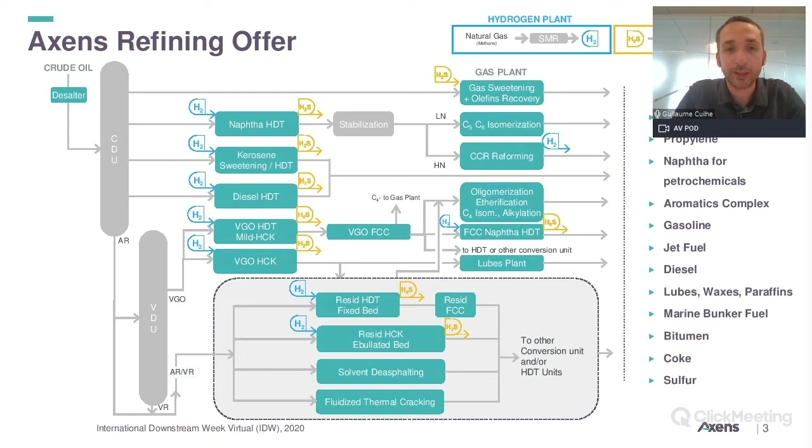Flexi-coking comes in complement to our portfolio, alongside our resid hydrotreating technology (Hyval), our resid hydrocracking technology (H-Oil), our solvent deasphalting technology (Solvahl), and now, in complement, the fluidized cracking technology, flexi-coking.

So why flexi-coking? Flexi-coking is there to target zero fuel. It means we will address both the new requirements in terms of fuel oil market and the new requirements in terms of petcoke market.

Why for the fuel oil market? Because we are going to produce no fuel oil market, no fuel oil. It means we are also going to produce no bunker fuel. This solution is good as it's not subject to future IMO specification changes. We see that in past years emissions have become more stringent on fuel oil, reaching down to 0.1% sulfur in bunker fuel.

Also, in terms of petcoke, flexi-coking produces nearly no solid fuel, and we see new petcoke specifications emerging. It's also producing lower sulfur petcoke, creating less dependency for the refiner on eventual future petcoke market evolution or specification changes.

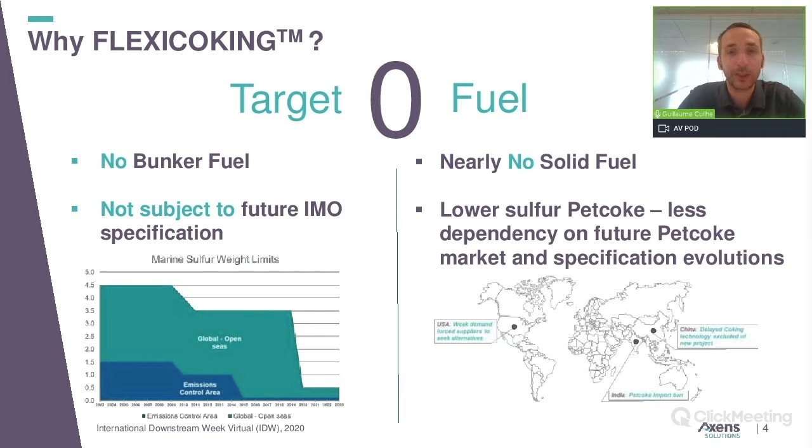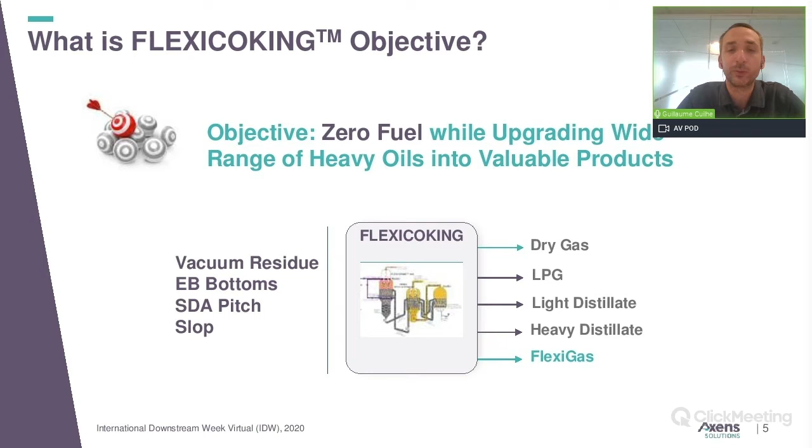So what is the flexi-coking objective? The objective is simple: zero fuel oil production while upgrading a wide range of heavy oils into valuable products. This wide range includes straight run vacuum residue, unconverted oil from ebullated bed, pitch from SDA, or any kind of slop from the refiner. Products include LPG and the whole range of distillates from light coker gas oil to heavy coker gas oil, while producing some flexigas.

What are the general principles of flexi-coking? It's a fluidized thermal cracking process operating at low pressure, less than 2 bar, and high temperature, around 520 degrees C. It's a non-catalytic process, integrated with a gasifier. This gasifier supplies the energy for the process, upgrading the coke produced inside the reactor into flexigas, with a limited purge, generally less than 2%.

The typical performance of flexi-coking is basically full conversion of the feedstock, up to 70% liquid yield according to the type of feedstock, and 3 years of cycle length.

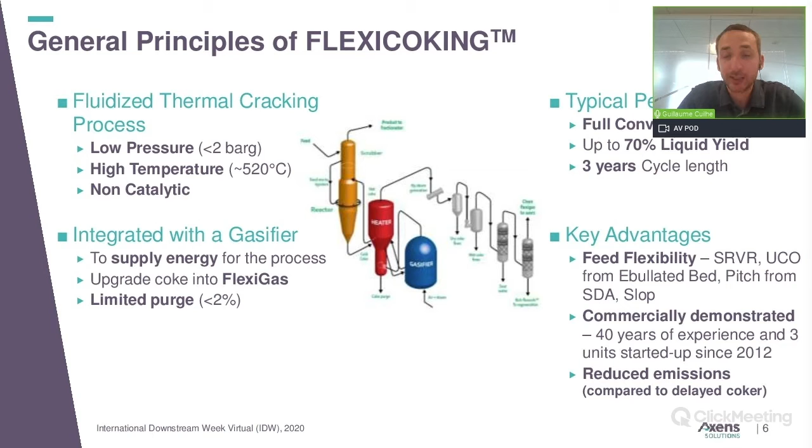Among the key advantages: feed flexibility, of course, processing straight run VR, unconverted oil from ebullated bed, pitch from SDA unit, or slop. It's a commercially demonstrated technology with more than 40 years of experience and 3 units started up since 2012. It also shows reduced emissions compared to a delayed coker, as it's a closed process.

If you look at the simplified scheme of flexi-coking technology, it basically consists of 4 main sections. Let's say a reaction section, which has the 3 main vessels of the process: the reactor, the heater, and the gasifier.

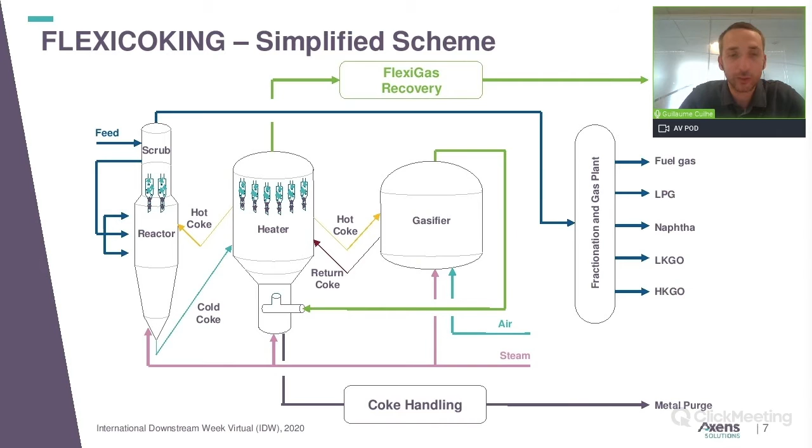And a flexigas recovery section to clean and de-particulate the flexigas. The coke handling section to handle the purge of the flexi-coking technology, and the fractionation and gas plant to recover and separate the effluents of the reactor into different cuts.

Among the technology capabilities of the FlexiCoking, it can handle up to 40% CCR. The largest operating unit is about 65 kBD, and it's demonstrated more than 95% of stream factor. The turnaround cycle is up to 3 years.

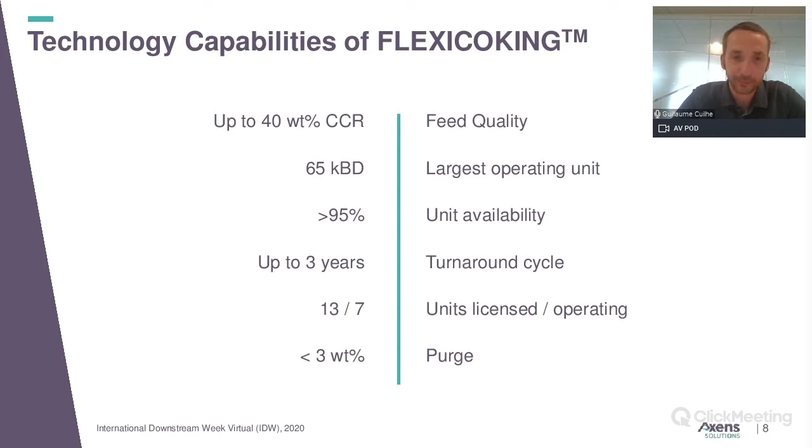There are 13 units licensed and 7 are in operation, with less than 3% of purge. Looking at typical performance of FlexiCoking on a 35,000 barrels per day straight run vacuum resid feed, we obtain around 74% of C3 plus yield and 420 megawatts of thermal energy. The breakdown of the liquid effluent is 6% LPG, 17% naphtha, 23% light flexi-coking gas oil, and 28% heavy flexi-coking gas oil, altogether producing around 3% of purge. The thermal energy is composed of flexigas coming from the gasified coke of the FlexiCoking, and some fuel gas that is also produced in the process.

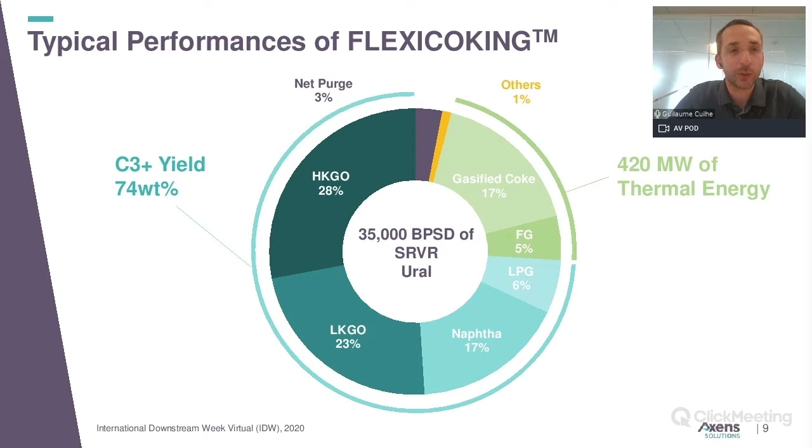What are the key advantages of FlexiCoking? First of all, it's commercially demonstrated, which is key when talking about heavy bottoms upgrading technology. There are 7 units in operation, more than 40 years of experience with this technology, and FlexiCoking has had 6 new licenses since 2012.

This technology also shows high flexibility and produces low-emission flexigas, meaning we can target zero fuel production. It can handle a large range of feedstocks and produces a flexigas with less than 10 ppm H2S content, meaning that while burning it will produce low SOx and low NOx. It's also CAPEX and OPEX competitive because it's a low pressure carbon steel construction process. It requires no catalyst and no hydrogen, and demonstrates a very high stream factor of more than 95%.

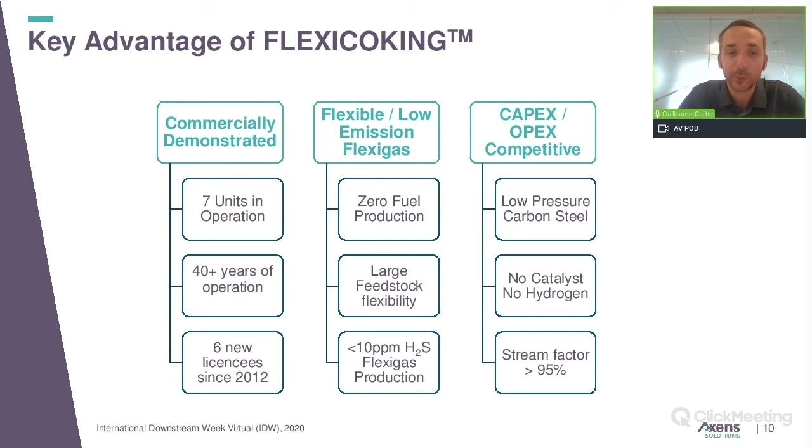Looking at the reference list, FlexiCoking in the world has 13 licenses spread across all continents - in America, in Europe and Russia, and in Asia. The oldest unit is in Japan, operating since 1976 in Kawasaki at 24 kBD. And the latest unit in operation was started up in 2019 in Hengyi, in Brunei, at 19 kBD.

The largest operating unit is in Venezuela, at 65 kBD, and there are two licenses in Russia, in Tuapse and in Moscow, at 50 kBD and 40 kBD capacity respectively. Two new units are expected to start up in 2021 - in Talara, Peru at 23 kBD, and in China, in Hongrun, at 19 kBD.

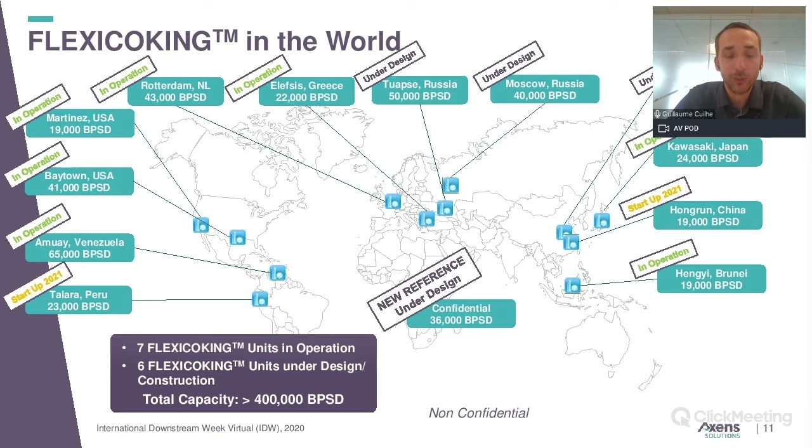FlexiCoking also brings a change in terms of utility balance. As it's a flexigas producer, this flexigas can substitute for fuel gas. It can be used in various places inside the refinery, for steam production, for electricity production, and more generally in refinery and petrochemical furnaces. Thanks to Heurtey Petrochem, we have unique know-how in furnace retrofitting while implementing FlexiCoking technology inside the refinery.

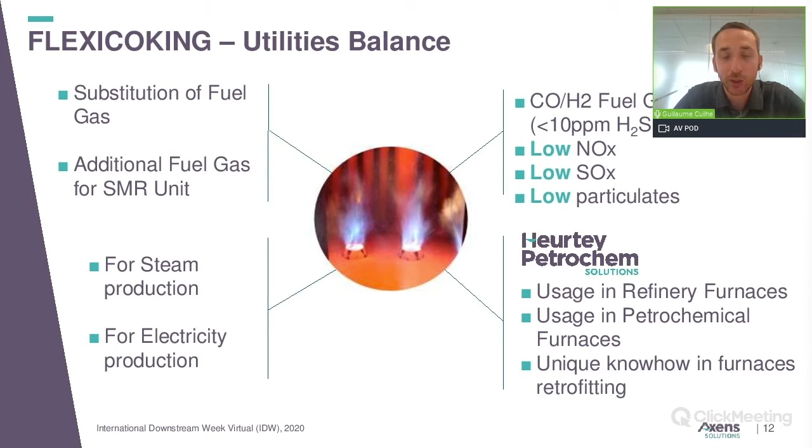More generally, FlexiGas is a CO-H2 fuel gas base, with a content less than 10 ppm of H2S, and while burning, it produces low NOx, low SOx, and low particulates.

What is the position of FlexiCoking in the Axens portfolio? It constitutes a new asset in our Axens bottom-of-barrel portfolio. In standalone, there is the known H-Oil process, which is a H2 addition technology, and now we have FlexiCoking, a carbon rejection technology. It can bring very high value, especially in combination.

For instance, H-Oil and FlexiCoking combined will bring the highest liquid yield, ideal for a zero fuel solution, limiting fuel gas production, and this can be seen as a staged investment. With SDA, we can also imagine SDA and FlexiCoking combined to upgrade the pitch coming from the SDA.

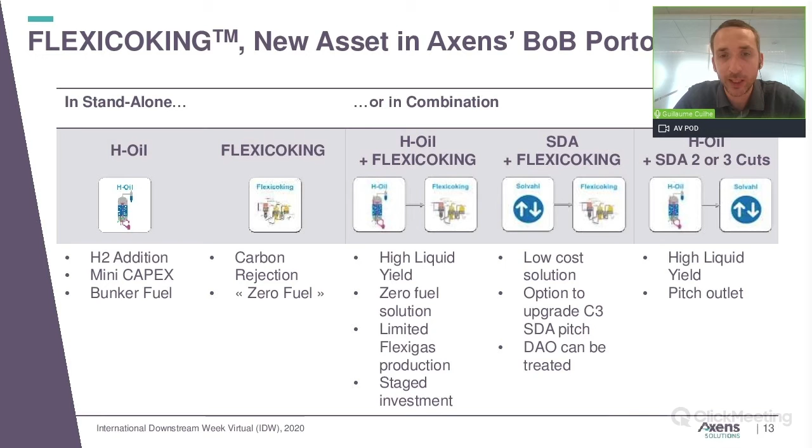Looking more closely at the H-Oil and FlexiCoking combination, it shows very high synergy, especially to target zero fuel. It can be a smart solution to answer the new IMO 2020 specification, as we produce a very limited amount - essentially zero fuel. In terms of petcoke, we produce nearly none. And in terms of economics, it shows the highest liquid yield.

In terms of flexibility, it's showing various optimization options. And there is various use of flexigas, as shown earlier.

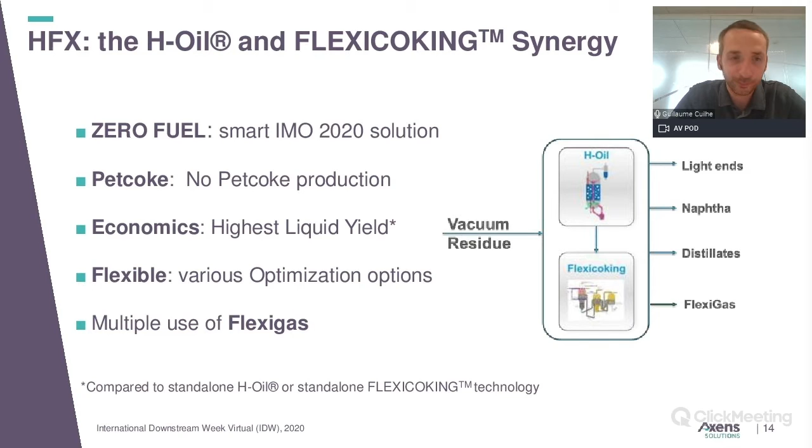So if we look at the typical conversion and performance of both technologies separately, H-Oil and flexi-coking on Arab medium: the typical conversion on this type of feedstock can be up to 93% on H-Oil, and we can reach a full conversion with flexi-coking. In terms of C3-540°C yields, it's 72% for H-Oil and 66% for flexi-coking.

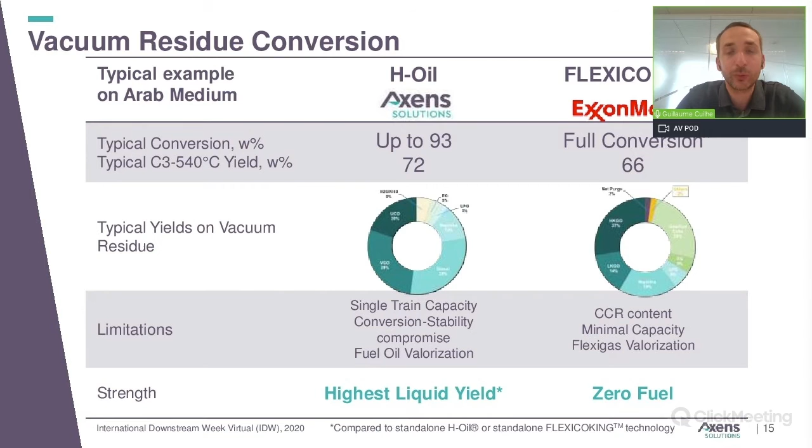The point of this synergy is to gather the strength of both technologies: the highest liquid yield from H-Oil and the zero fuel oil from flexi-coking. We see that all together, on the same feedstock, we can reach up to 84% liquid yield while combining the technologies, and significantly reduce the quantity of flexigas that has to be valorized, down to 8-9% of the total feedstock. This combination accommodates very well, especially at very high capacity.

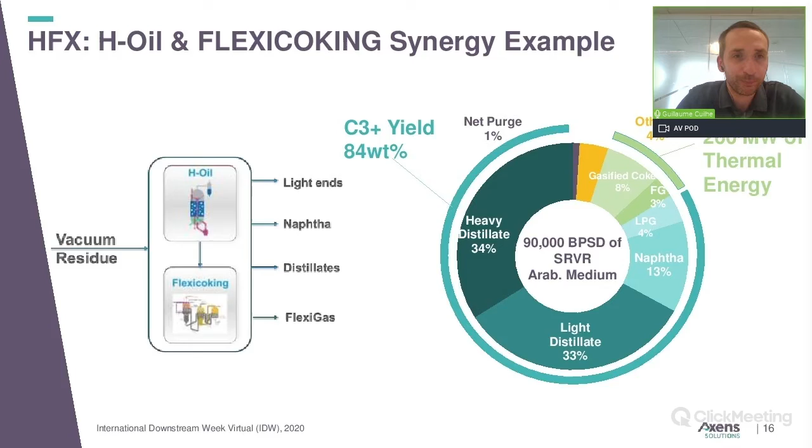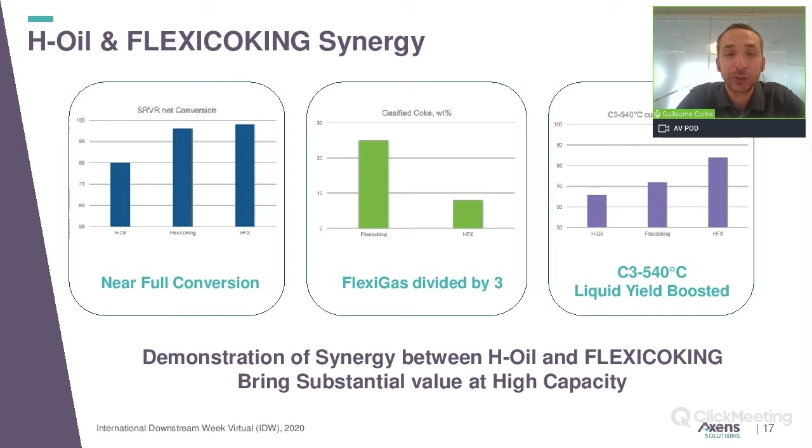This example was set at 90 kbd of straight run vacuum residue on Arab medium. If we look at some key indicators, the H-Oil and flexi-coking synergy shows a near full conversion of the vacuum residue, flexigas production divided by 3, and the C3 liquid yield boosted up to 84%. This is a clear demonstration of synergy between H-Oil and flexi-coking that can bring substantial value, especially at high capacity.

Among the takeaway messages I want you to remember from this presentation: flexi-coking answers the zero fuel target, and it also answers the challenge of reliability and performance for vacuum residue processing. And of course, in combination with H-Oil, flexi-coking and H-Oil show a very high synergy to reach high performance and high flexibility.

Thank you very much for the introduction, and welcome to my presentation. I will talk about advanced catalyst testing and how to add value to catalytic bottom of the barrel upgrading.

Let me start with some slides on our company to give you an idea on where we actually come from. HTE is a high throughput experimentation company, a worldwide leading provider of technologies and services on enhanced catalysis R&D. We are the largest independent high throughput lab in the world, with more than 50 reactor systems in-house. We are roughly more than 300 people, located in Heidelberg, Germany. Here on the left, you see some of our customers: major oil companies, catalyst vendors, chemical and petrochemical companies.

On this slide, we have two main areas where we are active. One thing, here on the right, is that we build turnkey ready test systems, which we sell to our customers. The second part, what we call R&D solutions, is that we utilize our test equipment to make contract research. The important thing to note here is that if we do research programs, all the catalyst and process IP belongs to the customer.

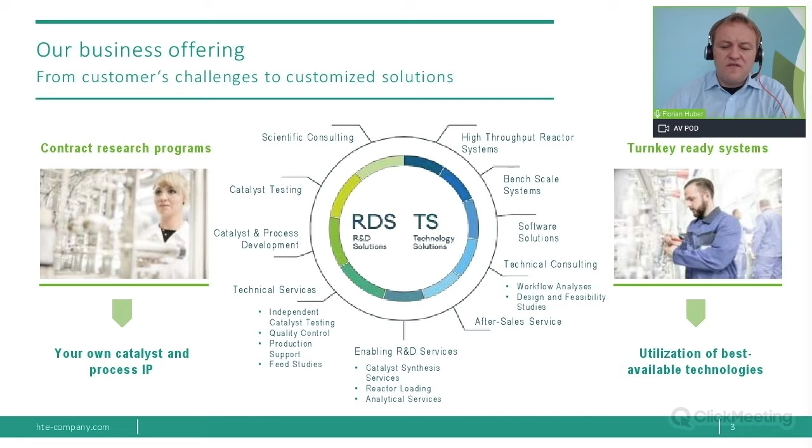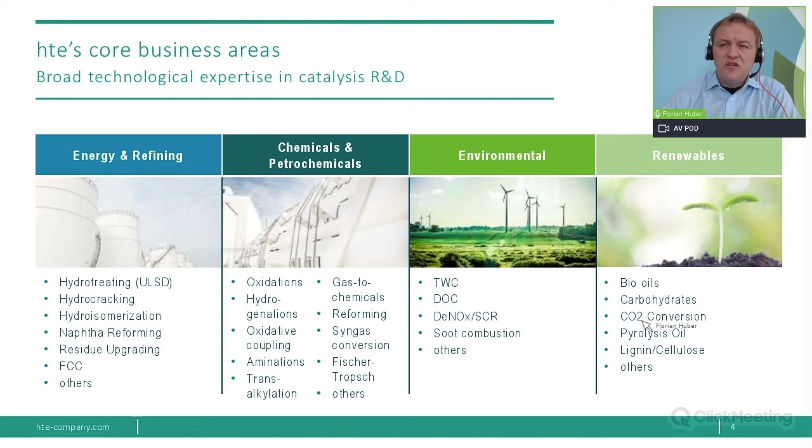On the next slide, I'll give you an idea of which applications we're focusing on. We are active in the refining and energy area: typical hydroprocessing applications, naphtha conversion processes, and FCC applications. We're also active in the chemical and petrochemical area, with typically syngas chemistry, oxidations, hydrogenations. We are also active in environmental catalysis, for automotive catalysis but also stationary emission control. And here on the right, we are also more and more active in renewables, meaning biomass conversion to biofuels and biochemicals, CO2 utilization, waste stream utilization, and also plastics recycling.

Now let's come to advanced testing. In the next slides, I will give you some key features of what we think is important when we talk about advanced testing. We are not talking about academic research here, but really industrially relevant catalyst testing, in particular for adding value to bottom of the barrel upgrading.

Here you typically have many reactors in parallel. You have small amounts of catalyst and you can test powder and shape material. Everything here is about multiplicity - you have many reactors in parallel, so you can test many formulations in parallel and have a direct head-to-head comparison.

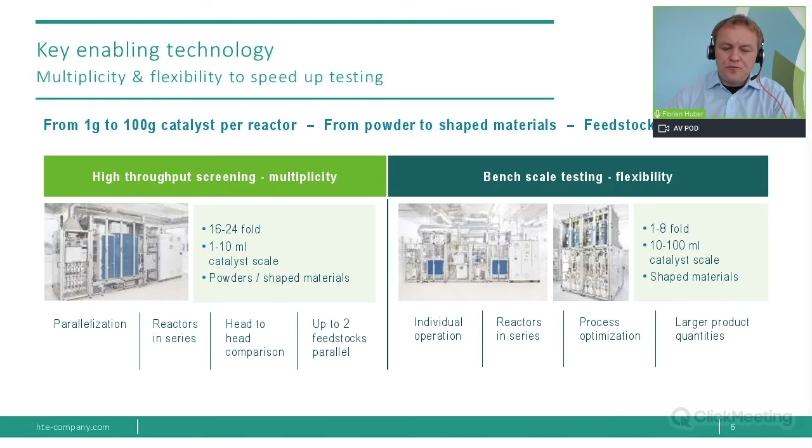On the other side, we have bench scale technology, where you typically have fewer reactors, so a lower degree of parallelization. You have larger catalyst amounts, and you typically focus on shape material. Here, everything is about flexibility - individual operation of your catalyst systems for process optimization and also for producing larger amounts of product quantities.

If we now look into a typical trickle bed test system, which can be used for bottom of the barrel upgrading, the really important thing is that with your system, you can really simulate industrial operation conditions, meaning you are able to operate at the relevant temperatures, pressures, and flow rates. You really need to operate in the industrial window to truly add value to the refinery.

In addition to that, what is very important for the refinery, of course, is full mass balancing, because the refinery needs to know where the products go and what the yields of the different products are. They also need product fractionation for your test, and detailed product analytics, because they want to know the key fractional properties of their different cuts.

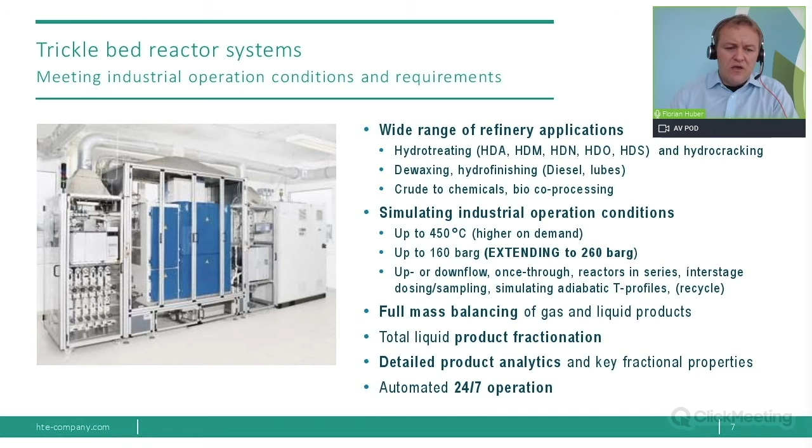So that's about the technology. If we now come to the catalysts - typically when we talk about high throughput experimentation, traditionally people would think it's about testing powders and model catalysts, but that's not true anymore. Nowadays, the focus on high throughput testing is actually real commercial catalysts and shapes.

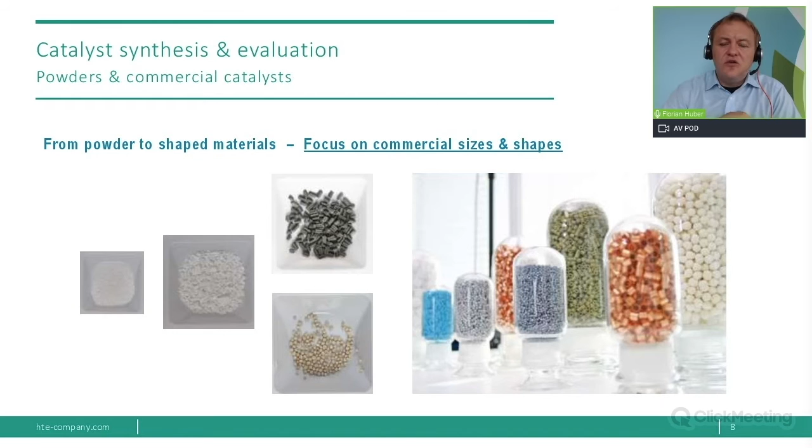If you want to add value to your customer, you really need to be able to test commercial catalysts, commercial sizes and shapes in your unit, irrespective of the scale you are using. Then you can really make a difference.

The same is true for feedstocks. Again, some people think high throughput means model compounds, but over the years, high throughput has really developed into using the real material. So high throughput testing really also needs to be able to process the real industrial feedstocks coming from the refinery. Then you add value to your refinery.

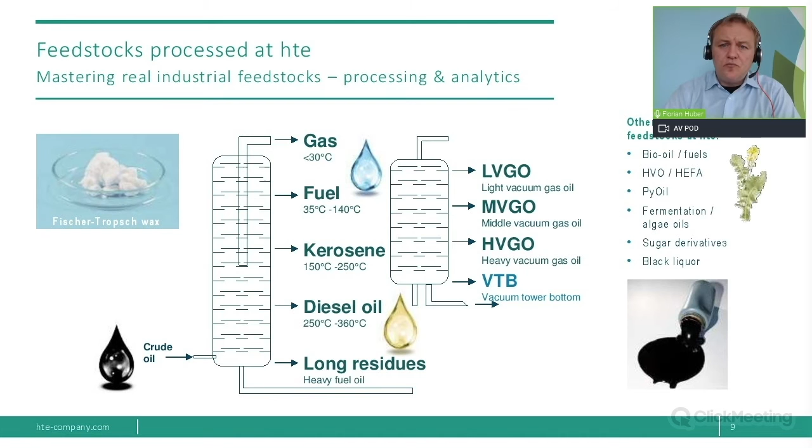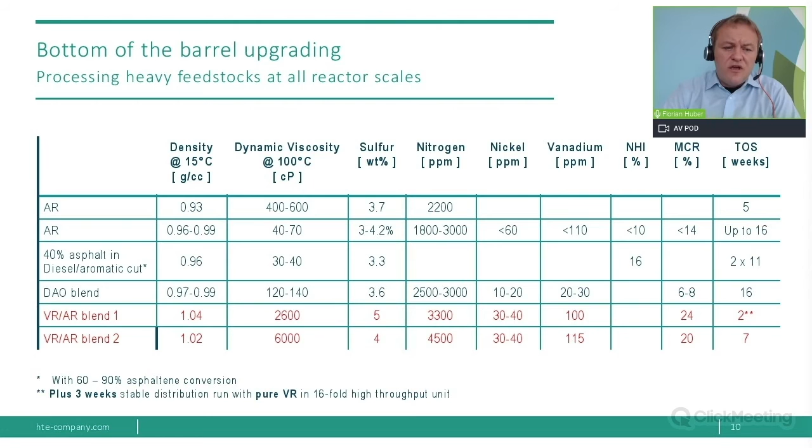On the next slide, we have an example of a typical residue hydrotreating application. If you look into an industrial reactor, you typically don't have only one catalyst in your reactor - you have several catalysts, a complete catalyst system. If you look at resid, you might have a HDM catalyst with high metal capacity and moderate activity, then a transition catalyst with lower capacity but higher activity, and then the very high active HDS function.

If you want to do testing for the refinery, you need to look at the complete system, investigate the whole system. And here, high throughput testing really has a benefit, because you can typically test many reactors in parallel here, like 16 reactors. With these 16 reactors, you can really test different combinations of this catalyst system, different stacking approaches.

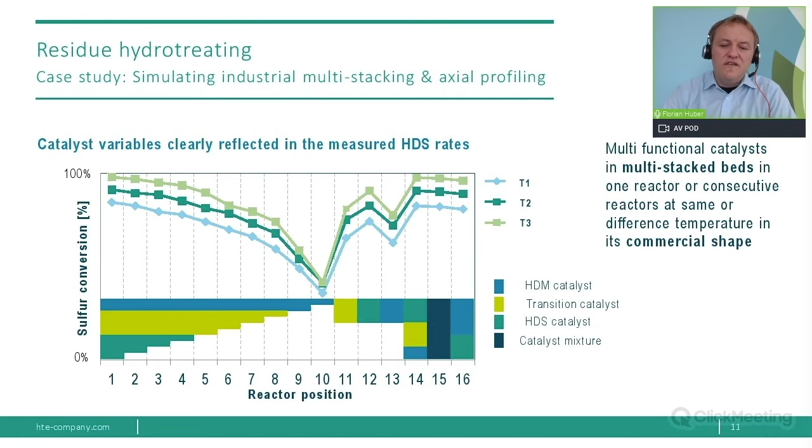If you want to utilize high throughput experimentation, you also need to take this into account. So what we have done over the last years is make reactor-in-series operation also possible in the high throughput, meaning in the small scale testing area.

You can think the same about three reactors in series. If you take a typical 16-fold unit where you have 16 individual heating blocks, we can test several complete systems in parallel. For example, a two-reactor system lets you test 8 systems in parallel, 8 different combinations. With 3 reactors in series, you can test 4 systems in parallel.

And at the same time, you get the full interstage quantification. So that really shows you that you can gain speed and get your data fast, enabling a fast catalyst selection process in this way. So that's some key features.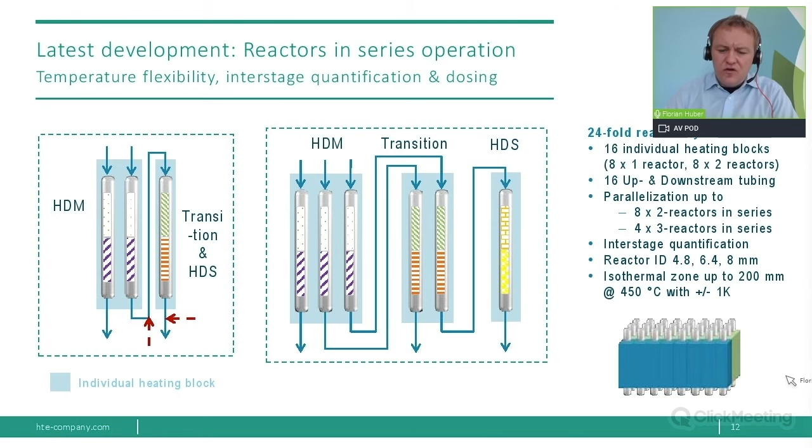On the next slide, I want to share a case study we did with our customer SK Innovation, a South Korean refining company. The area is again residue hydrotreating. They typically work with pilot plant scale facilities, but wanted to know if they could utilize high throughput technology for their industrial research, and still speed up the research while getting meaningful data. So they took our technology and compared it to their pilot plant data.

And the outcome, what you see here, is that this high throughput data produced with small scale catalyst and feedstock really matches the pilot plant data.

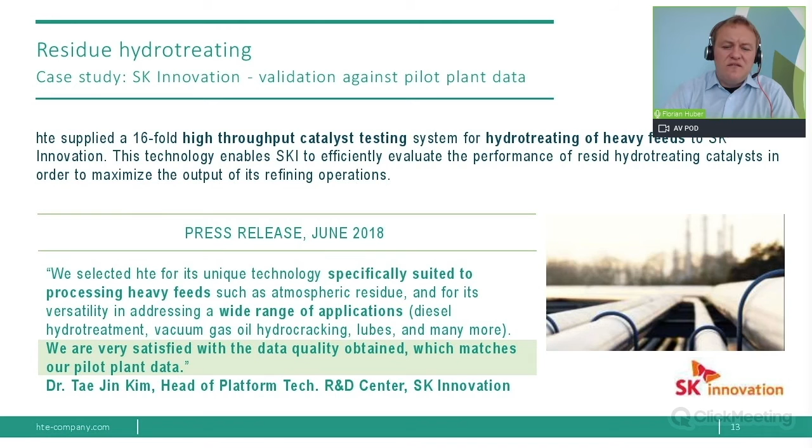So with this, I'm already at the last slide. I hope I could show you the key features of advanced testing, and especially high throughput testing, and how to add value to areas like bottom of the barrel upgrading.

If we sum up, the key is a robust and flexible technology, because you're dealing with real, sometimes nasty feedstocks and commercial catalysts. Another point is, if you want to gain speed, you need parallel testing, head-to-head comparison. Then you have a fast response and get your data very fast. And we all know ordering a catalyst nowadays can take up to a year.

So if in this process you can speed up your testing to get results before you start ordering, you really have a benefit there. As I mentioned, testing is only meaningful if you can test commercial catalysts, if you can take the real feedstock from the refinery, the actual feedstock being processed, and meet the operation window of the refinery. Otherwise, all your data—selectivity, yields, output—you can't be sure they're in the meaningful window.

As I also showed on the slide before, you need proven test protocols. You need to validate them against industrial experience or pilot plant data to be sure it's really valid what you get out, so that you can directly use it for the refinery.

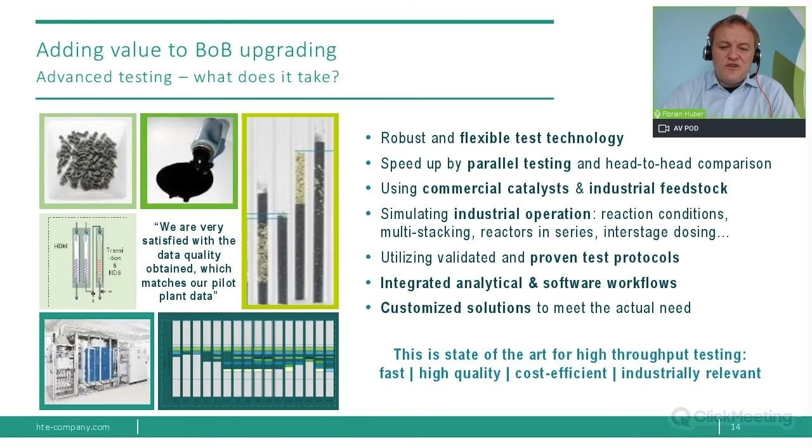Thank you for the introduction. I'm really pleased to have this opportunity to talk about Shell's moving bed technology and how it can be used to improve the performance of deasphalted oil hydrocracker or residue hydrotreating units, and how in particular the technology can be used to allow refineries to process difficult, high metals content crudes.

As we all know, refinery margins are being squeezed at the moment with additional crude capacity becoming available, and also new conversion units being commissioned. This is at a time when the demand for refined products is under pressure. So it is important that refineries take action to improve their net cash margin generation capacity.

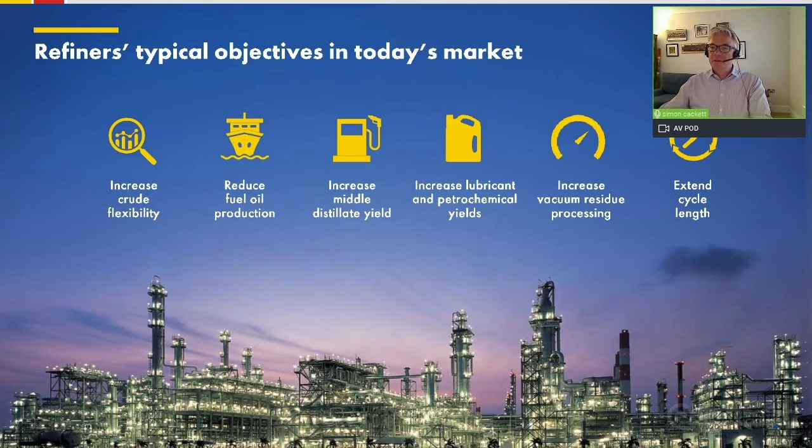Shell first commissioned its Hycon moving bed technology in 1989 at Pernis refinery in Rotterdam. The technology was incorporated in a vacuum residue hydrocracker, the so-called Hycon unit, and it was designed to process vacuum residue from Maya crude. Maya vacuum residue contains approximately 250 parts per million metals. So the unit was designed with 3 moving bed reactors with a total of 7 moving beds, and the purpose of these reactors is that fresh demetallization catalyst is added on a semi-continuous basis to the top of each reactor. This catalyst removes, or allows the removal of, metals from the feed.

The reactors are then followed by 2 fixed bed reactors where additional Conradson carbon reduction is affected, and also the feed is converted to lighter products. The unit has consistently achieved 2-year operating cycles, processing 100% vacuum residue.

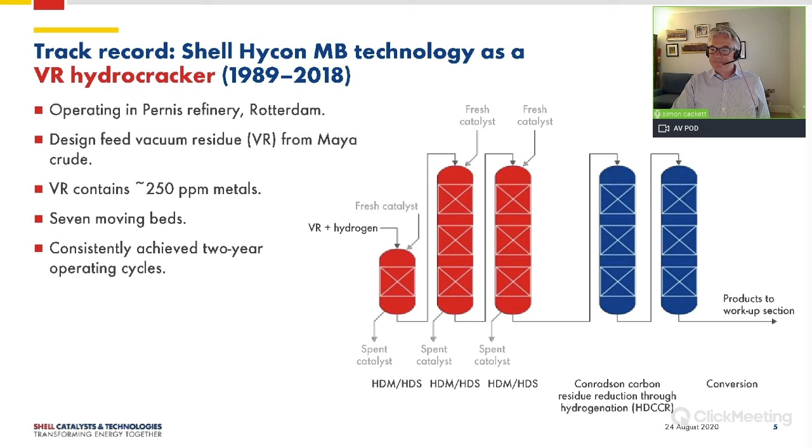Since 2018, the Shell Hycon unit has run as a deasphalted oil hydrocracker. A solvent deasphalter was placed upstream of the unit, and now with the new feed quality, the amount of metals to the unit is up to around 95 parts per million, which means that we only retained 1 moving bed reactor, and the now 4 fixed bed reactors are there to achieve complete demetallization of the feed, removal of Conradson carbon, denitrification, and conversion.

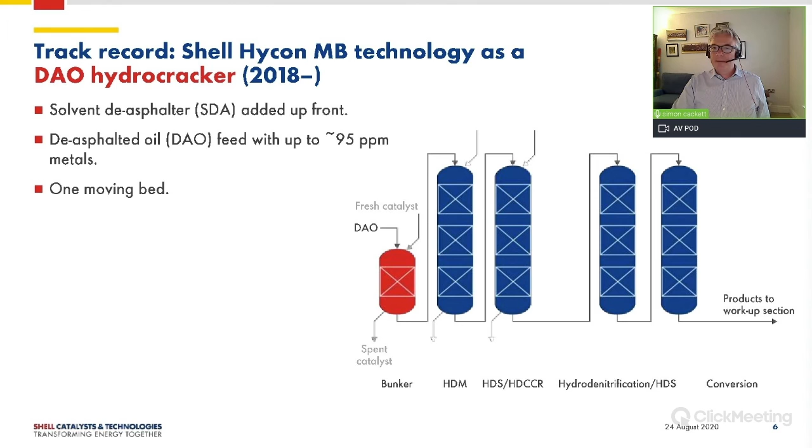So what does the moving bed technology do? It allows fresh demetallization catalyst to be added on a semi-continuous basis, so that you can achieve consistent high activity with no real deactivation as the cycle progresses. The rate at which the catalyst is replenished can be adjusted depending on the amount of metals in the feed.

The system includes proprietary internals, so that the feed is properly contacted with the catalyst, and there's also a system so that the catalyst can move slowly through the reactor and be removed from the bottom. If for whatever reason the catalyst has not absorbed a lot of metals, it can be recycled and reused.

So moving bed technology can be a very good revamp option for an existing hydrocracker or residue desulfurization unit. This can either be achieved by placing the reactor on the plot space of the unit to be revamped, or by building a new unit upstream of the process units.

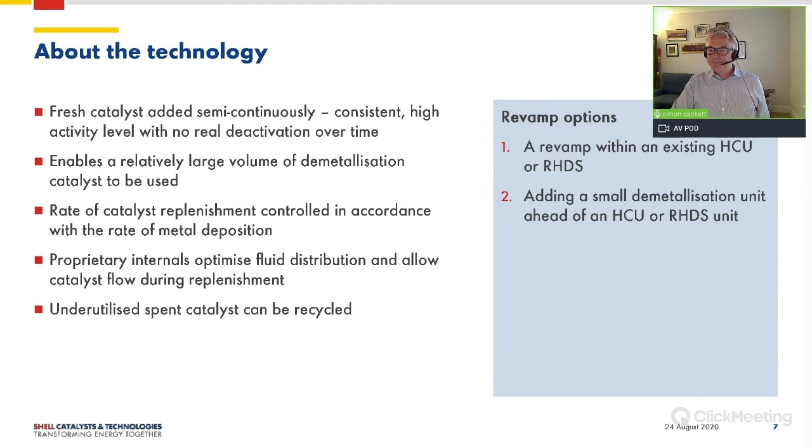So to summarize, Shell moving bed technology was started up in 1989 in vacuum residue hydrocracking mode and was revamped to deasphalted oil hydrocracking mode in 2018. So Shell moving bed technology has now been in operation for more than 30 years. Since 2020, the technology and all the associated intellectual property and operating experience has become freely licensed in the market.

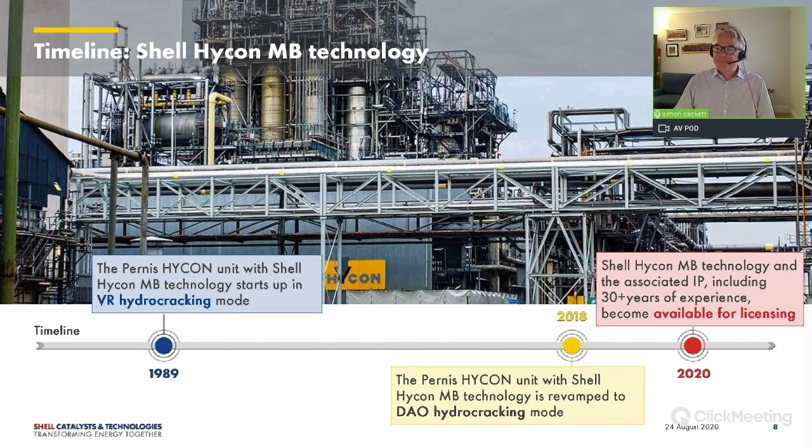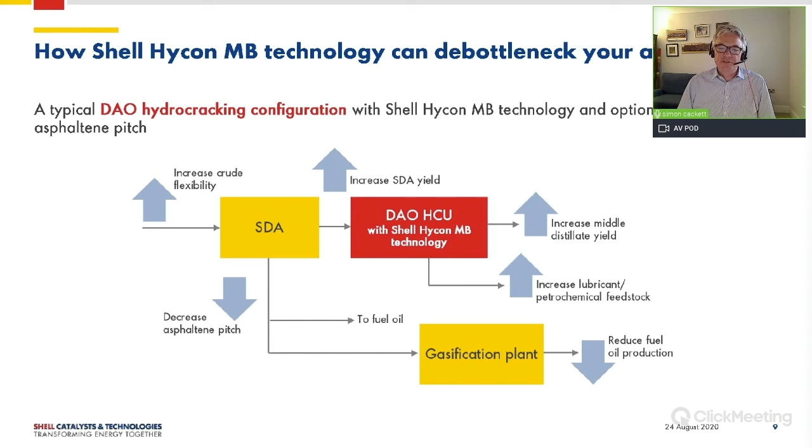This plot diagram shows a typical configuration for a deasphalted oil hydrocracker with Shell moving bed technology, with a solvent deasphalter upstream of the unit, and here we've shown an optional gasification unit. The moving bed technology allows a higher extraction depth in the solvent deasphalter, which means the process will produce more middle distillates. It also produces more high quality unconverted oil that can be used as a petrochemical feedstock or for heavy base oil manufacture, and it reduces the amount of pitch and therefore the amount of fuel oil produced.

The next slide shows some numbers, and these numbers are for a typical heavy crude from Arabian Gulf feed. So for a deasphalted oil hydrocracker, the metals need to be limited to around 35 parts per million if you want to achieve a 2-year design cycle. By adding one additional moving bed reactor, the amount of metals in the feed can be increased conservatively to 95 parts per million, and this enables a higher deasphalted oil yield. For this example, the DAO yield can be increased from the high 50s to the high 70 percent. This obviously has a significant positive impact on project economics.

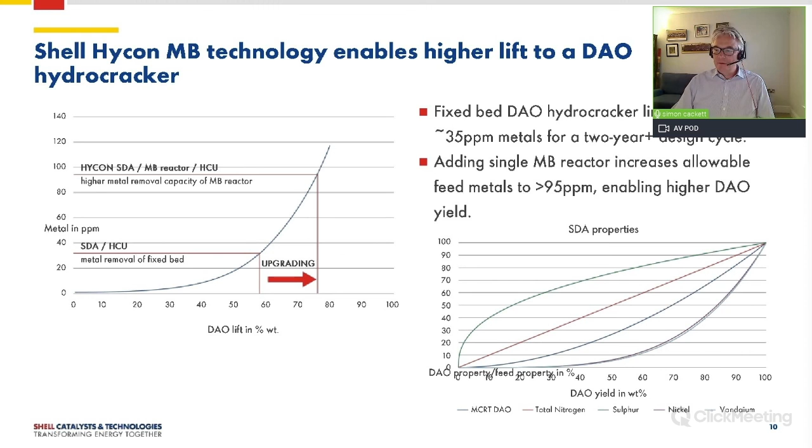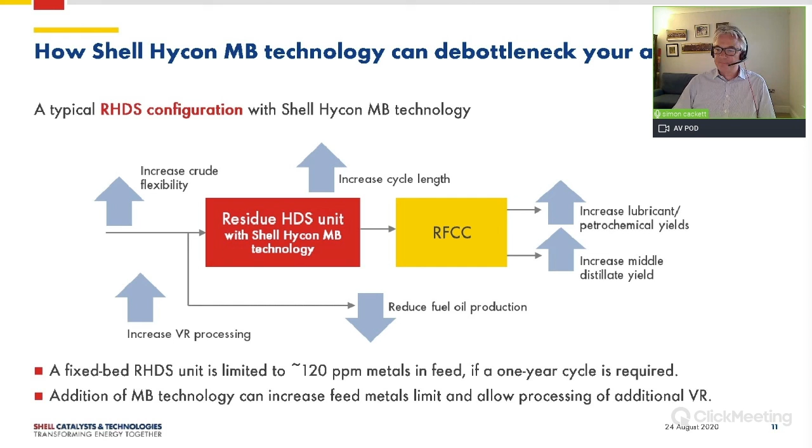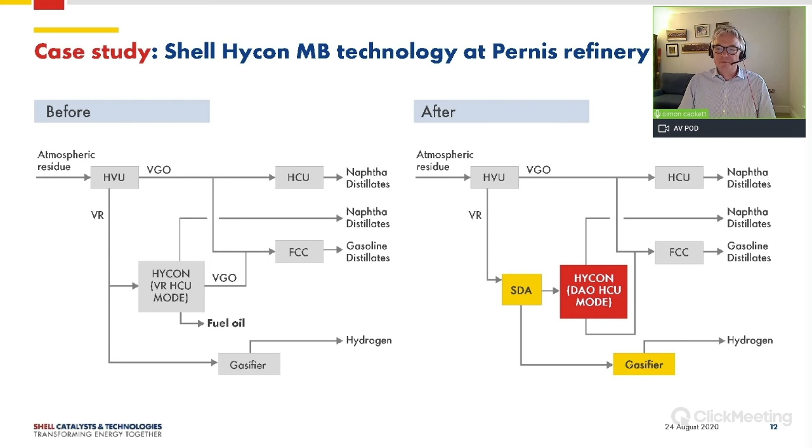So the revamp actually required an investment of around $500 million, which was significantly cheaper than the alternative options that we looked at the time. The DAO hydrocracker is now designed to allow the refinery to process large quantities of crude from different supply regions.

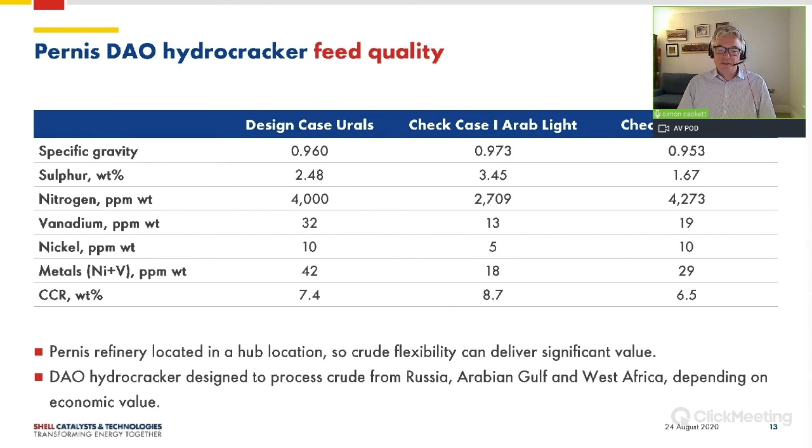So it can process 100% Urals or Arab Light or West African crude. The feed CCR for the unit can be as high as 8.7% weight, and you can process more than 50 parts per million of metals in the unit. The unit produces high quality distillates that can be directly blended into either the jet or the Euro 5 pools. The unconverted oil is fed directly to a VGO hydrocracker.

In summary, the unit has now achieved a 2-year operating cycle, operating at 75% conversion to diesel and lighter. It has enabled the refinery a significant increase in crude flexibility. It has reduced the amount of fuel oil that the refinery produces by 35%, with a corresponding increase in middle distillate yield.

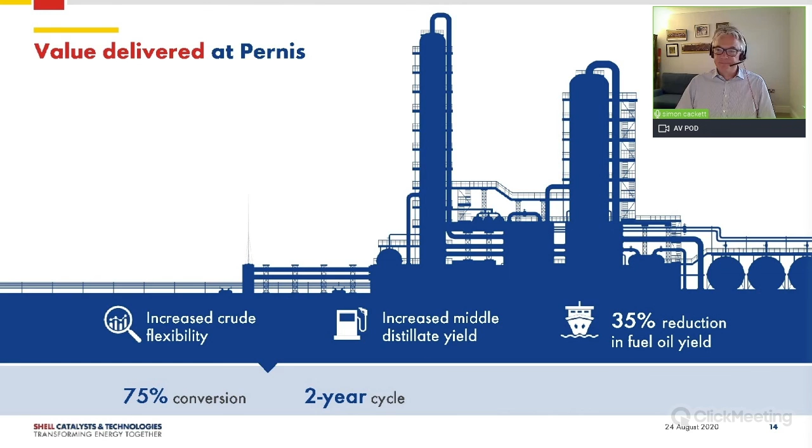So now coming to my final slide and my key takeaways from my presentation. I just wanted to say that Shell Moving Bed technology has a proven track record. It's provided Pernis Refinery the ability to run high metals content crudes for more than 30 years. The technology is now available for licensing for the first time because we recognize that reducing fuel oil production and increasing crude flexibility is a margin driver that applies to many refineries around the world.

A residue reduction solution, including the solvent deasphalter and a DAO hydrocracker with moving bed technology, is a realistic option that requires moderate capex for many refineries around the world. I'm just hoping that this presentation gives people some food for thought. Thank you very much.